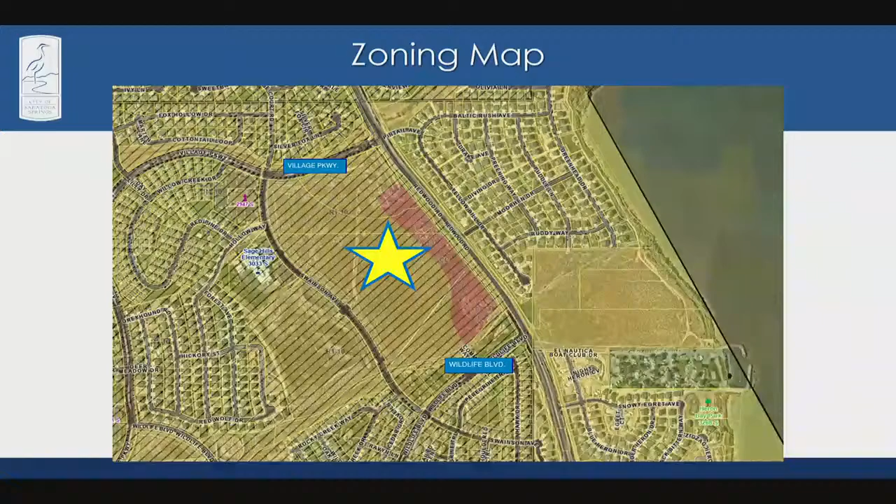So it comes for feedback on the concept plan, but a PUD also allows what we call variations, and so there are some requests. Okay, so just for those that aren't familiar with the area, this is in between Village Parkway and Wildlife Boulevard. So it's that empty piece of land there, and we already had a public comment tonight on this area. This is the concept plan that they're proposing.

It comprises of 172 single-family units, 136 townhomes, for a total unit count of 308. They have approved MDAs, which allows them to go up to 335 total units. So this is actually below the total unit count that they're allowed per the MDA. Also the MDA allows them to go up to 136 townhomes, which is what they are currently proposing on this plan.

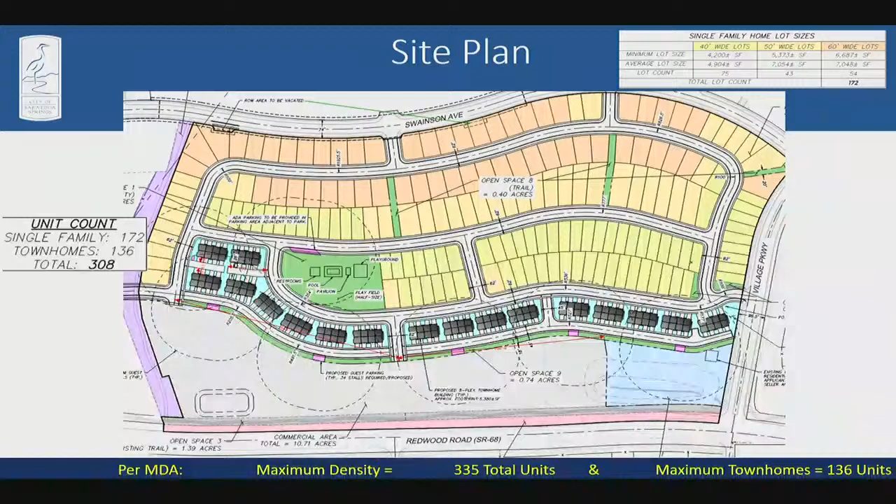The concept plan does propose lots with reduced widths. This is common in a PUD because the purpose of the PUD is to protect the hillsides and the open space, and so we encourage clustering. And when you do that, it's typical to see narrower lots.

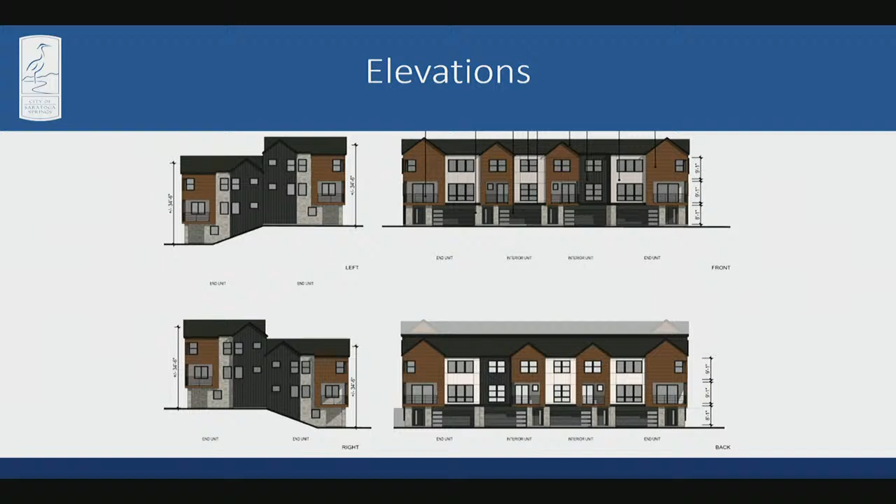In addition to the concept plan they're proposing, they're also requesting some variations. As mentioned, they're requesting a variation on the lot width, to go from 70 feet down to 40 feet, and then lot size to go from 10,000 square feet to 4,200 square feet. Those are standards in the R110 zone, but because it's in the PUD, those are typical things that might be granted. The other request that they have is a request on maximum height.

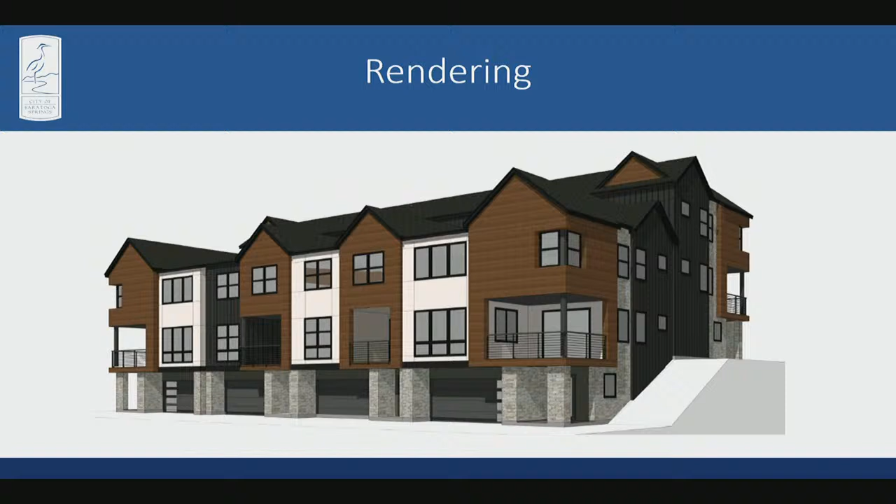So they have two requests here, either A or B, and they're hoping for one or the other. Preferably, they are asking that height be measured differently than we outline in Title 19. They're requesting that we measure the height from the front of the building, so on those split units, you would measure the height from the bottom unit up to see where it is, and then go around on the other side and measure the height from there.

So they're requesting the midpoint? Yeah, that would be the midpoint of the roof. My comment was right. Yeah, correct. The only time we'd measure to the top of the roof would be if it was a flat roof structure. But on a sloped roof, it's to the midpoint of the roof.

So their request is either to measure the height from the front of the building, or if we're not willing to do that, then their other request would be to have an exception to allow a height of up to 41 feet, 6 inches. The standard in that zone is 35 feet in the R110 zone. So they request, if we don't measure it the other way, then they would request that we grant them a 6 foot, 6 inch exception.

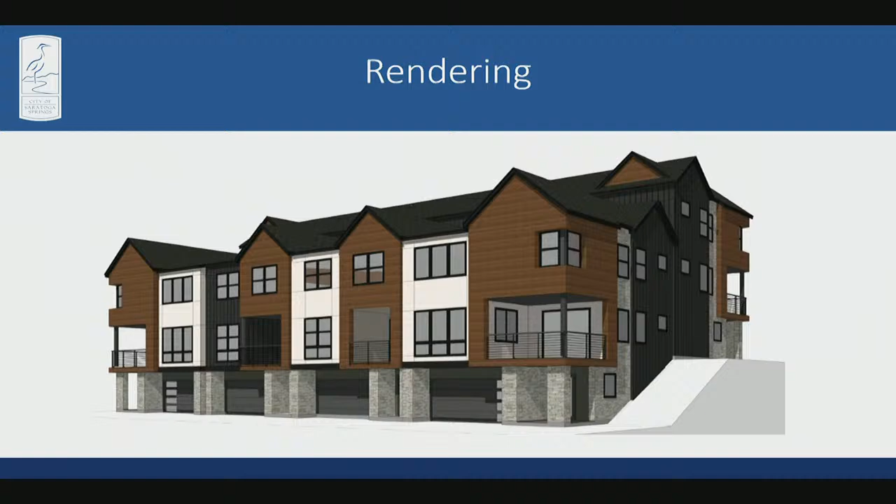It doesn't show. My understanding, correct me if I'm wrong, is the pitched - we're not quite through the presentation, but there's two products they're proposing. One is a flat roof product. If that's not amenable and approved, then the pitched roof product is what they would propose, and that could meet code the way it's shown? Well, not necessarily. You still need the height measurement. Okay, I'll let them get into it.

The applicant has a presentation as well, but we'll keep going through ours and then they can give theirs.

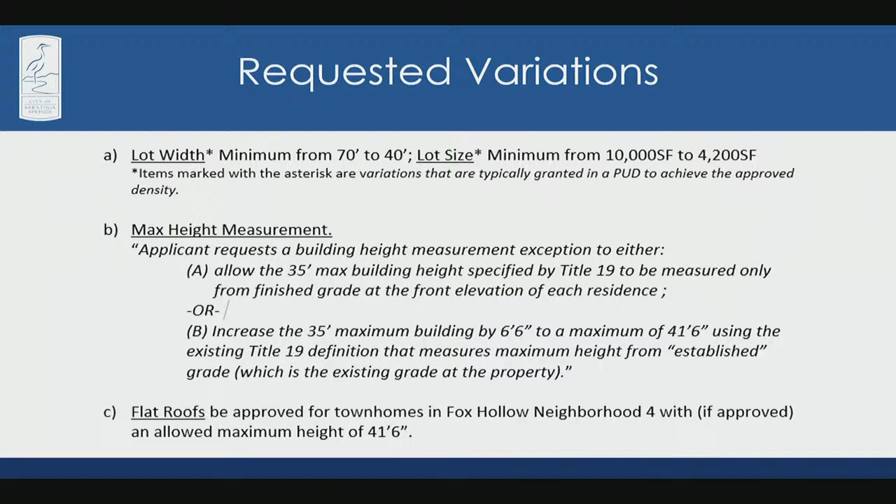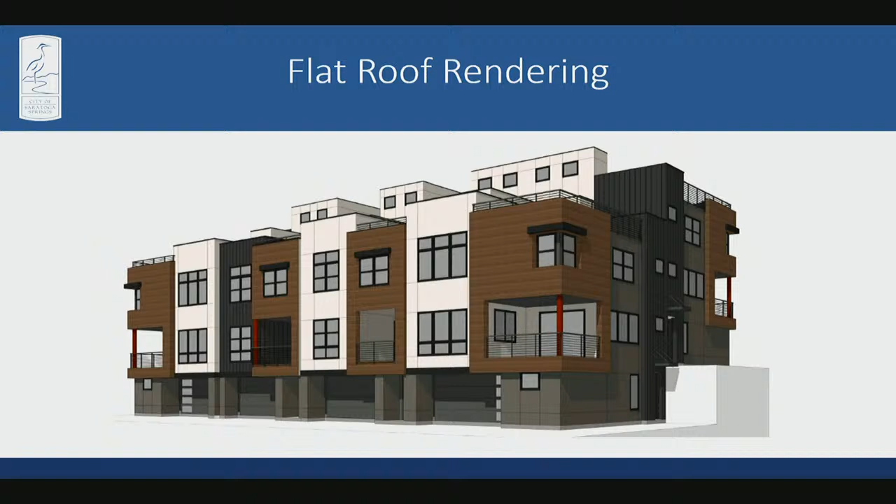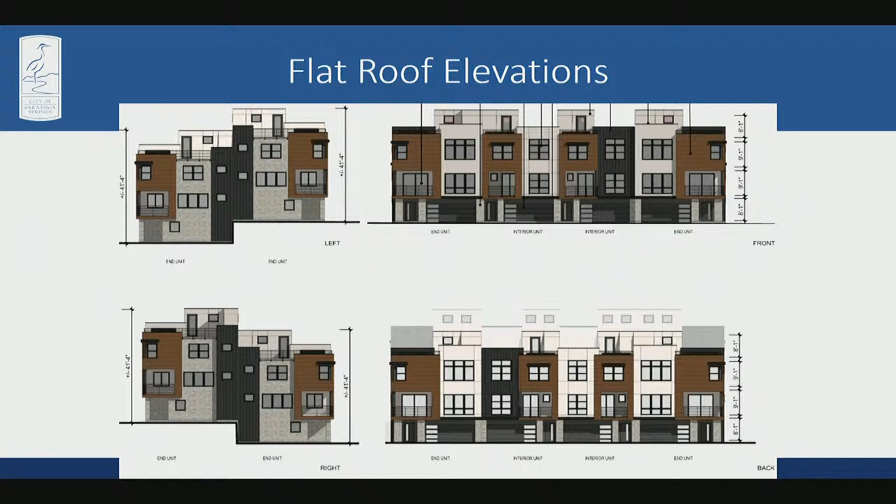What's the height of that product? If you measure it to the midpoint, it would be the 41.6 to the highest point of the flat roof structure. So they could make either option work with that height exception for this flat product. But one of the things it would give them is additional living space. These units, because they're back-to-back, don't have a yard like a backyard, so it would provide some kind of living space for the townhome residents.

Austin, real quick, has Jess looked at the building height on this one for fire? I know typically the residential height is closer to 33 or 35 feet. 35 to the midpoint. Right, so my only question is has he reviewed these for height relative to fire response and things of that nature? We haven't asked him to. Okay, yeah, we looked at these in DRC, but we haven't. The only reason I bring that up is it would require probably a ladder truck if there were a structure fire, and we have one, but it's a longer response time.

Or is that just with the flat roof? Yeah, so you have to remember there's two things here. On a pitched roof, we measure it to the midpoint of the roof. So it's normal for it to go a little bit above that line, but if it goes more than the midpoint, then they're kind of in trouble. So as long as they can keep it under that, then they can make it meet our code.

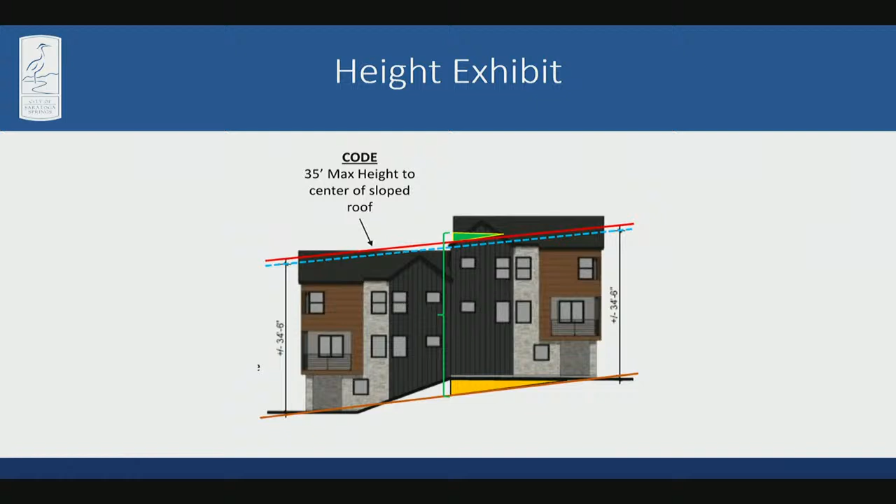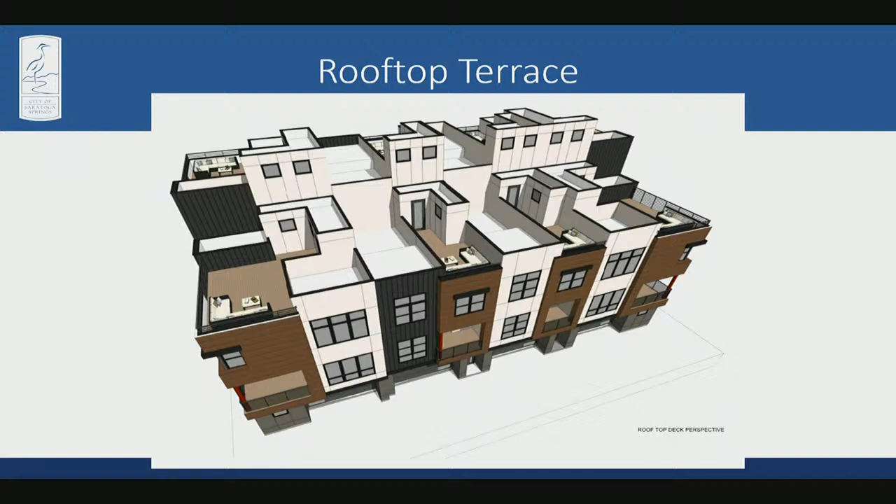David Crockett on behalf of the applicant, Pulte Homes, 6965 Fort Union Center in Cottonwood Heights. First of all, on behalf of Pulte, we're delighted to be here. This is the first time we're actually submitting an application to the city of Saratoga Springs. So we're really excited about that. We're hoping it's the first of many opportunities that we'll have to address you.

If I may, just for a second, Pulte Homes is a large public home builder. We're the third largest in the country. We're making a market entry into Utah. Our founder, Bill Pulte, started the home building company 74 years ago and has built a great reputation. He's since passed, but our current CEO is actually from Lake Point out there by Tooele, born and raised, and then a graduate of University of Utah. In case that's concerning to anyone, I'm a graduate of BYU, so there's a little bit of balance for everyone. But some of you may be fans, so there we go. There we go, good balance.

So thank you again for the opportunity to present before you today. In June of 2022, this board, or maybe some makeup similar to this board, would have approved a concept plan that had this site plan on this very site. That site plan back in 2022 had 136 townhomes and 172 single-family homes. We've matched that with our site plan.

One innovation you'll see is this townhome product, where we've taken the townhomes and made them back-to-back, and then put a step in the building. That allows us to be responsive to the grade, which is one of the code requests - they want us to step down the side of topography when we can. When we do that, we take all of the buildings you see there with the blue background, the white that has the blue around it going up the side of the development. There are 29 buildings represented there.

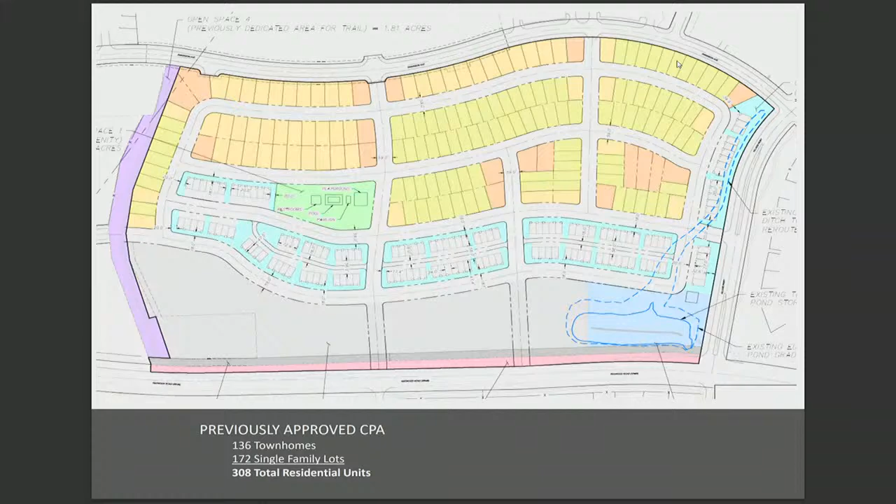And if you think about all that building mass, we actually consolidate it into 17 buildings. These buildings on this map are also 6 units wide, quite a bit wider than our buildings, which are only 4 units wide. So if you were to drive through the community built out in this scenario versus the scenario we're proposing, you would see far fewer buildings, and the mass or width of those buildings is narrower overall, while we still maintain the same unit count. This also helps us be much more responsive to the existing terrain.

Most home builders and their civil engineers, if doing a good job, try to match or balance the cut and fill on a particular job site. We are very close to doing that here. On average, our cut and fill is about 1.5 feet. Along where the townhomes are, our worst condition is 3 to 4 feet of cut or fill in any one location. On a site as large as this, going from Swainson at the top of the screen down to where the townhomes are adjacent to that future commercial, there's over 70 feet of drop in that dimension. So we're working against that situation.

And then when you go from north to south, it's not just perfectly flat - there are actually pockets where the ground undulates like that. That's an important thing to point out, which we'll get to. Right by the park, the park's right above it. Yep, it's across the street from that park.

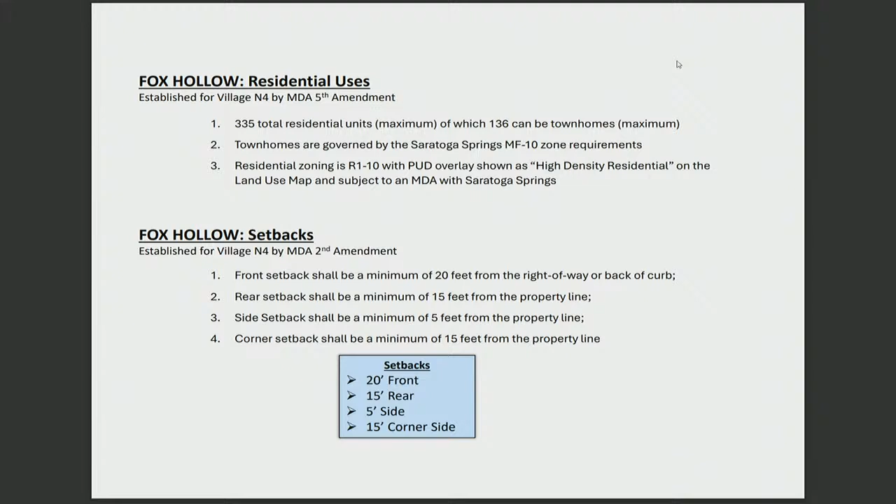In terms of the master development agreement, it's that Fifth Amendment that specifies the 136 townhomes. It also specifies the 335 total units, as was pointed out previously. We're submitting for something less than that, 308 total units. We're also designing to meet all of the setbacks called out in the Second Amendment of that MDA, so consistent with both of those.

Our single-family detached architecture, these are images from the front of the buildings. We have 40-foot wide lots, 50-foot wide lots, and 60-foot wide lots.

These lot widths in the MDA were allowed to go down to as little as 35 feet of width. The developed community that's already out there has lots smaller than the ones we're proposing, and some that are larger, because you can go as large as you want effectively. So some mix of all of that, and these lot sizes fit within that master plan and that MDA.

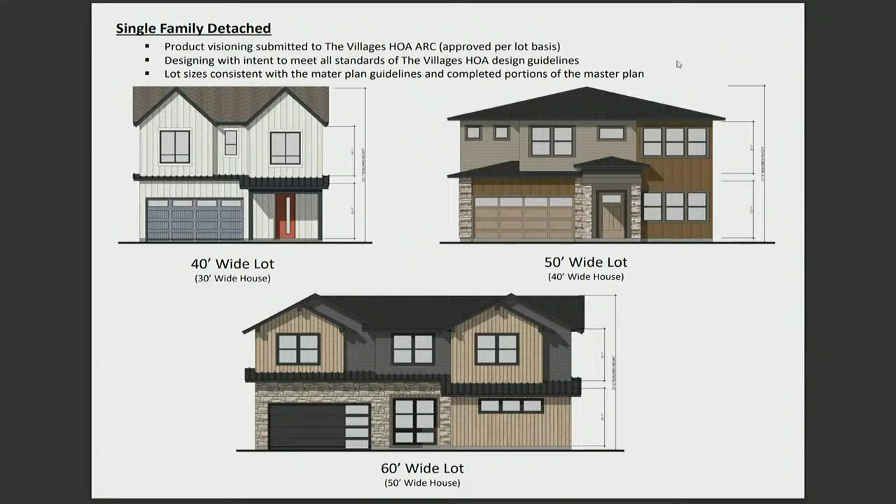We're also designing our product and coordinating with the Villages HOA ARC review committee on all of this. Those permits and approvals are done on a lot-by-lot basis, so that's later down the road as we're building the homes, but we've started that process already.

As you've seen, we have this townhome. It has four-sided architecture because you have front entrances on both sides of the building, and then you've got this articulation around the building, so all sides have a nice architectural elevation. You can see the step in the building in this side profile view.

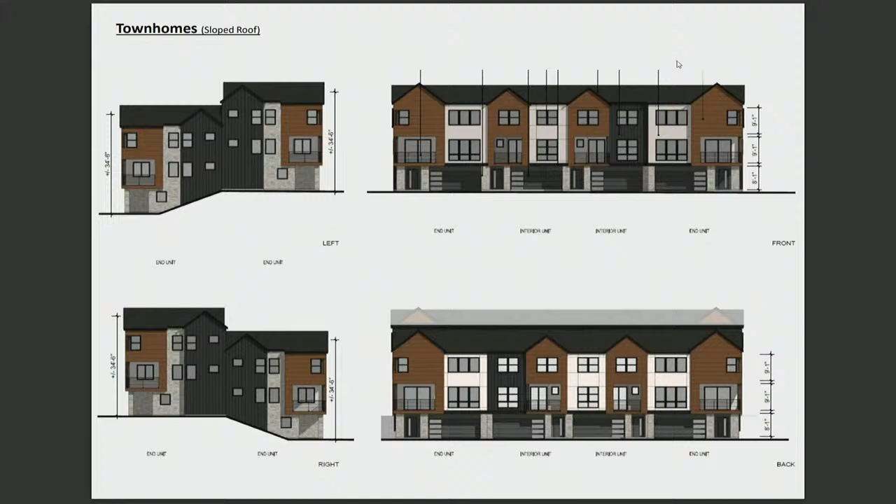Now we get to the nuance and the key request we have tonight. One of the challenges is, if this were as simple as measuring 35 feet from the foundation of the building to the top, we would meet that. Our building is actually 34 feet 6 inches tall, shorter than the 35-foot requirement.

Where we get into the difficulty is we don't actually measure, in code from Title 19, from finished grade, where the site actually gets finished, where people will be walking on the sidewalk, looking at the architecture, or driving through the community seeing the building. That dimension's measured from where the grade is today. Even though that grade will change, we could grade down and meet all of our buildings without making any changes whatsoever, or we could grade the site up and have all kinds of problems. We're trying to stay as close to the existing grade as we possibly can.

What we see here is that brown line on the screen is the line at the very bottom, and that green line on the bottom would be finished grade. In scenarios where we might be grading 3 to 4 feet max, making sure sewer flows the right way and drainage flows across this huge site, that all life safety elements and requirements are met, going from the grade and access point from Swainson at the top of our site, connecting into the commercial site and meeting all code requirements for how those streets slope down and connect into those locations - as we run all that complicated math, the issue is we're not measuring from this finished grade, which is what we would really hope we'd be able to do.

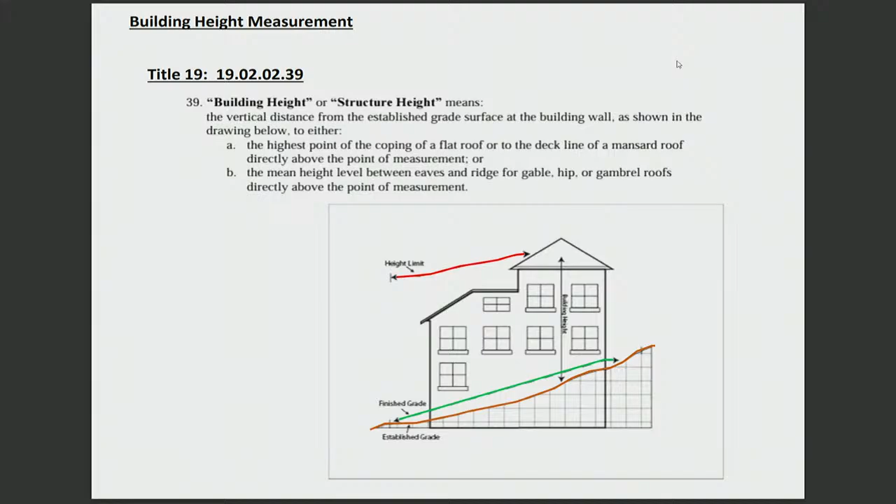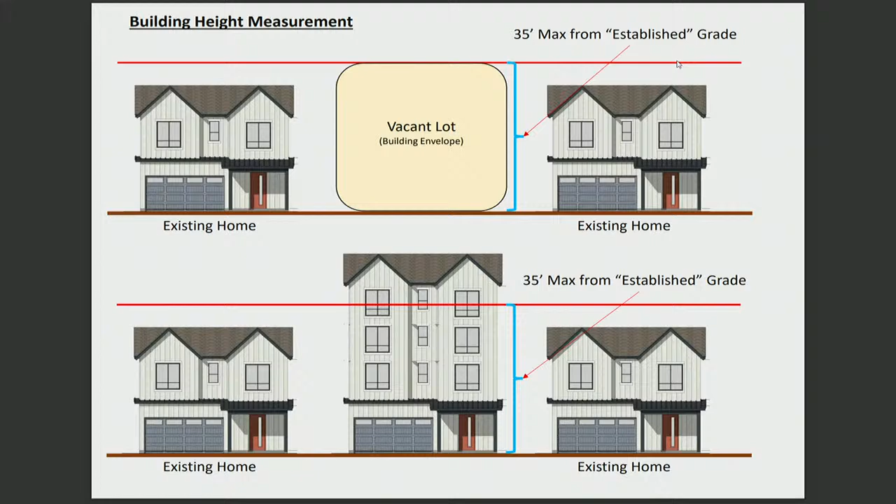I'm going to keep going to show a couple other exhibits. It would appear to us that the intent of the way that was defined would have been to protect existing homes, where you might have a vacant lot in between them, from the house you see on the bottom of the screen in the middle being built. If you've got a community where they're all two-story homes, then someone comes in and tries to build some monstrosity, that would certainly seem unfavorable. So the code, the way it's drafted, would address that.

It would also address the same size home, but someone who wants to try to take advantage by building their lot up - the concept is there, right? Oddly enough, the picture on the bottom in the middle would actually be allowed. That would be code compliant, the way it's drafted, if you dug your home down.

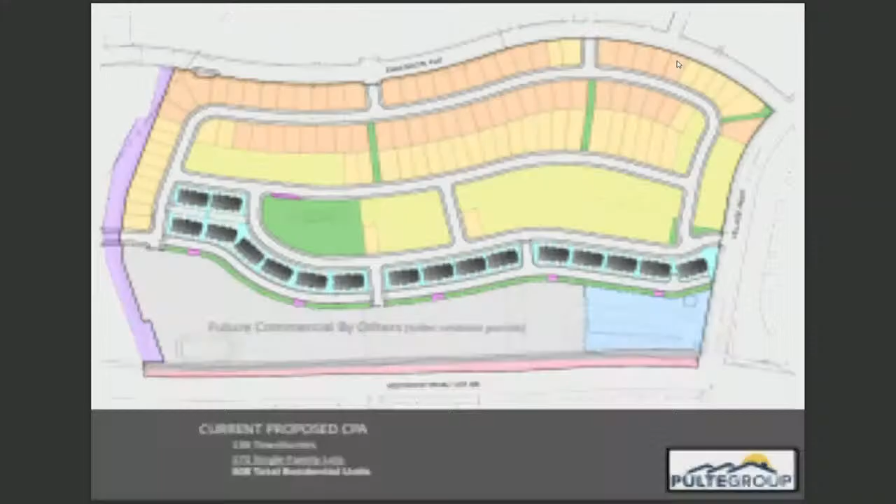So again, just kind of looking here at the site plan, the next image that I'll show you is actually our cut and fill. And what you'll see is just colors that go on this site, red and blue. Red is a cut location, blue is a fill location.

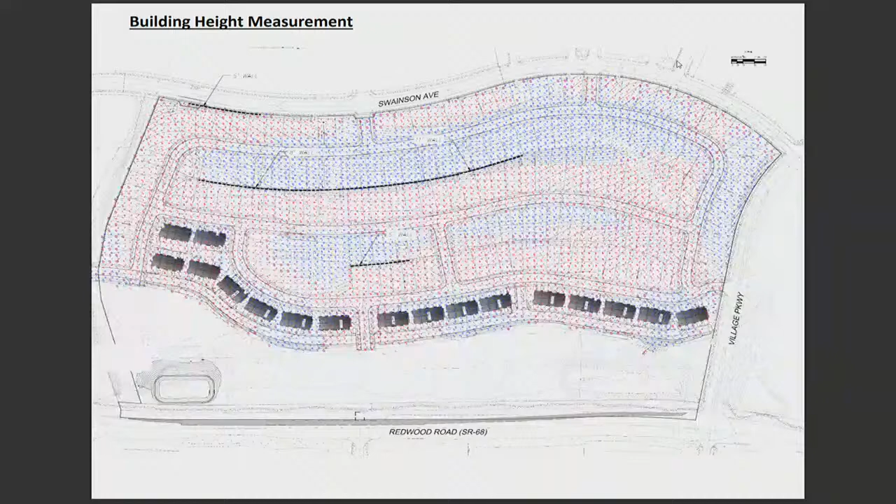As you look down there along the townhomes, you can see that from the north, there's just pockets where the ground goes like this, and we're just smoothing that out. In some areas that's a 2 to 4 foot fill, in other areas it's a 2 to 4 foot cut as we smooth all of that out to make it work. And so that creates a little bit of an issue.

Even though when it's finished grade and you've got that line there on the bottom, when you're standing in front of the building, our building is actually less than the 35-foot requirement at 34 feet 6 inches. Because the terrain is sloping down and we have fill in some areas, that area in yellow represents that 2 to 4 feet in a maximum situation, which is having the effect in the middle of the building of pushing that building up and making it feel taller, even though when we're out there, when the whole thing is graded and it's built, it won't look that way. It's actually from the existing grade today, which won't exist in the future.

And so we have a challenge in that area that's causing some constraints for us with that 35 feet. Then when you get to the top of the building, you can see that the way that measurement is made is from existing grade. So on that top red line, it actually slopes and follows the terrain of the property.

But the challenge is homes are rectangular shaped, right? So these homes aren't even that deep, but will meet the requirement at the front of the unit. But by the time you get to the back of the unit, because that 35-foot height measurement has to keep stepping down to be consistent with existing grade, then we run into a challenge there.

So it's as simple as, if we were willing to say we'll measure the 35 feet, which is the requirement, but from the front of each unit, then it'd be totally fine for us. And that would be what we're requesting today: to measure the maximum 35-foot height from finished grade at the front of each unit, and not from the established grade, which is the technical term, or the existing grade today.

As a side note, and I'm not sure if those images are in this—oh, they're not, okay. As a side note, just as a reference point, single-family detached has a different set of standards that apply to it in the way that they measure. We had some slides in here that helped depict this, but on a walkout basement, you have a house at the front that might be a 2-story home.

On the back of that house, where there's a walkout basement, you have a 3-story home. And if you were to measure from the footing or foundation there to the midpoint of that roof on almost every home, in the homes to the north of us and to the south of us, that dimension is probably 41 to 43 feet. Those are existing homes that are in the neighborhood right now.

But all of those homes are also on fill lots. So as the builder has developed, whether it was Richmond or anyone else, as they've developed those lots, they've created fill on those lots—some of them 12 to 15 feet of fill. And so if they were held to the same standard as the townhomes, those homes would be 50 feet in the air by comparison to what we're doing.

I only bring that up and point that out because the buildings that we're proposing here, even though it sounds like we're asking for this height variance, they're going to appear shorter than the backs of these walkout basements on the single-family homes that are all around to the north, south, and west of us. They're all building on the same slope. We have pictures that depict that and show that.

And so I just would point out that these buildings in this request are actually visually going to appear shorter than those adjacent buildings. They're just measured differently, the way that works through state code.

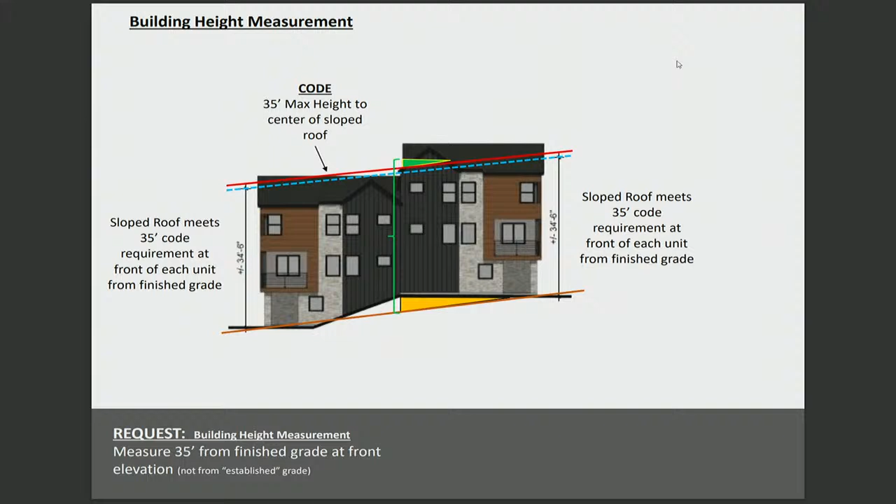So that was the first key request. I don't know if it's appropriate to pause here for questions or to keep going, because we do have one other one. How would you like me to proceed? Just keep going, okay.

So the second request has to do with indoor-outdoor living, highlighted in yellow here in the middle of the screen for the two plans in our townhome lineup. We have indoor-outdoor living on that main level, which is really important, especially since we have amenity space and open space in the community that people can access. But when you have a townhome, it's really key to have that indoor-outdoor living, so all of our units will have that.

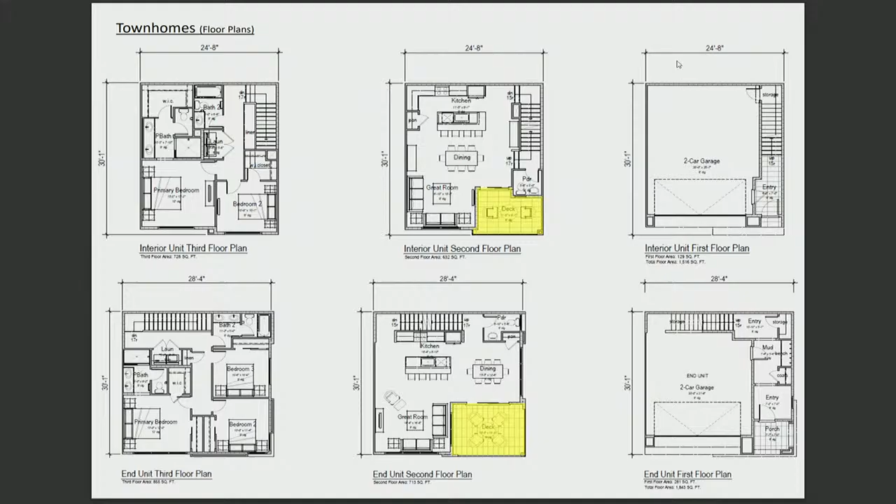What we would propose, because of the location, where you have views across the lake and across to the other side with the Wasatch Front Mountains sweeping into view, is really an opportunity to showcase the city's topography and beauty of its location, kind of unique all along the Wasatch Front, which is what Saratoga Springs has here. We think a townhome with a flat roof that would accommodate a deck up on the roof would be something that homeowners and residents would really appreciate.

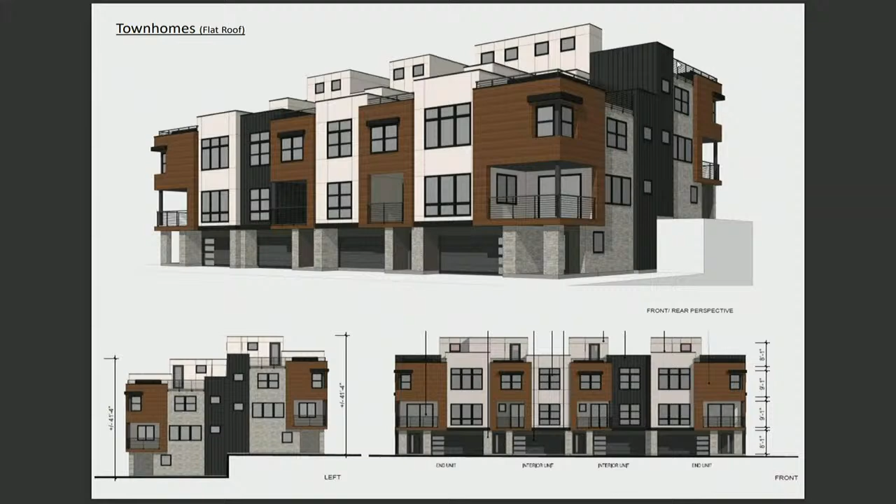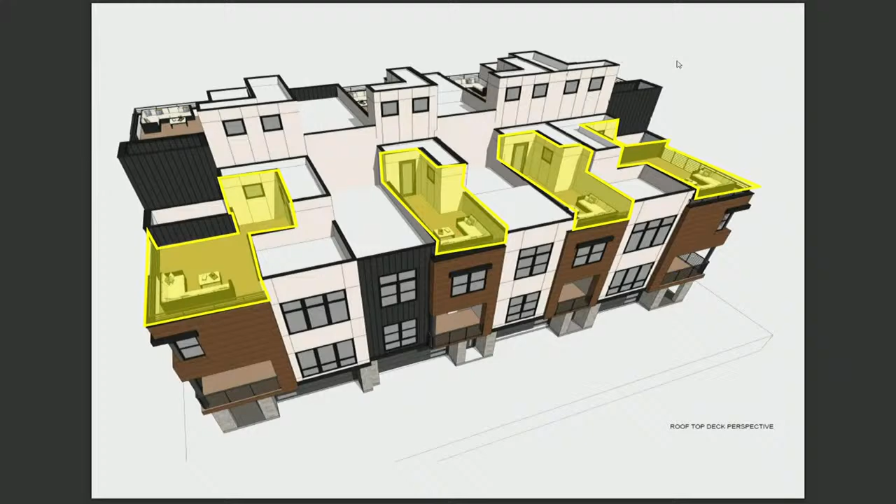Again, if the council does not want to support this, we understand, and the sloped roof product we're very happy to build exclusively as well. But we think there's an advantage to be gained here. You can see highlighted in yellow the rooftop deck locations—the way we try to design these is so that they're kind of separate and apart, so there's some privacy for individuals up there on the roof, and some elevation between each of those outdoor spaces to help them feel private and be very usable.

3 feet 8 inches taller, and it's only taller where we have the staircase to get them up onto the roof. Up on the front of the building, it's actually shorter than the sloped roof solution.

So the request here would be a little bit different and distinct for these flat roof products. It would be, A, to allow the flat roofs. Right now, they're not allowed. And B, if you were to allow it, to have that measurement be 41 feet 4 inches from the front of finished grade at each of those units.

Can I interject really quickly? I don't know that the applicant has seen this yet. I've been trying to reach out to the HOA for a few weeks, but we got a response this morning from the HOA ARC, and they have a concern with the flat roof design, that it's not going to match what's in the neighborhood. I wanted you to be informed, since it was forwarded just a few minutes before the meeting. The applicant does still have that request. We also let them know today that we got that feedback.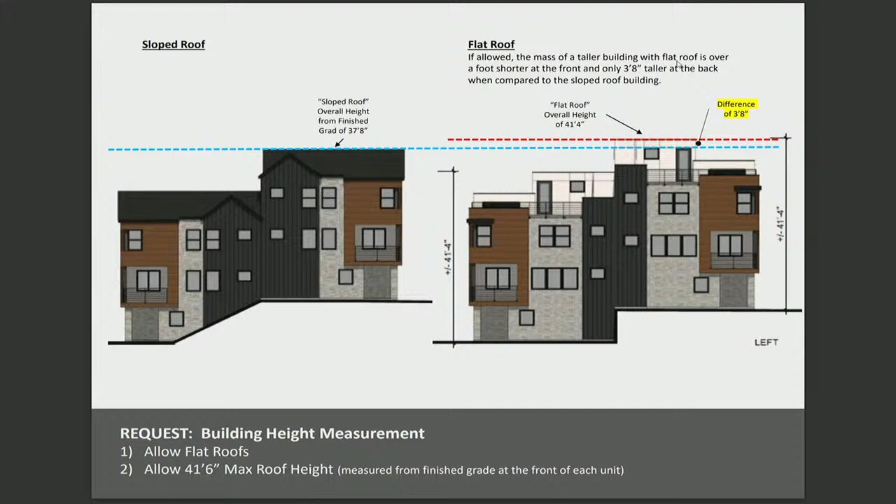Perfect, thank you. Okay, we'll start with the council. Councilman McComber. Thank you, Mayor. Just a couple things. On the requesting lot reduction, what additional open space did we receive? Because, what are we gaining? The whole point of a reduction is to get more open space. I'm seeing one park.

And that is a really good question. I know that in this plan you're seeing one park and some trail pathways. The comment applies to the entire master development agreement. So in the entirety, there was 25% open space overall. The park that's still not developed?

Right, right. And then this phase was granted the density that it has. So I understand what you're saying. Right, but we don't have to allow for more reduction in lot size. Or do we have to? Well, we have to allow the density.

We have to allow it, but they have to meet code. We've kind of run into this before. I think perhaps Kevin should speak to this, just because the master development agreement grants a certain density, and without some variations, they can't achieve that density.

I haven't analyzed this in the detail you're probably looking for, but when you're talking about priority of vested rights in this development and in the MDA, density is going to be number one, along with the types of uses allowed. Then you have to weigh that with the rest of the development agreement, including the ability to ask for lot size reductions and so forth. So you have discretion within the code and within the development agreement to grant those or not, or those variations, as long as it doesn't impair the vested rights.

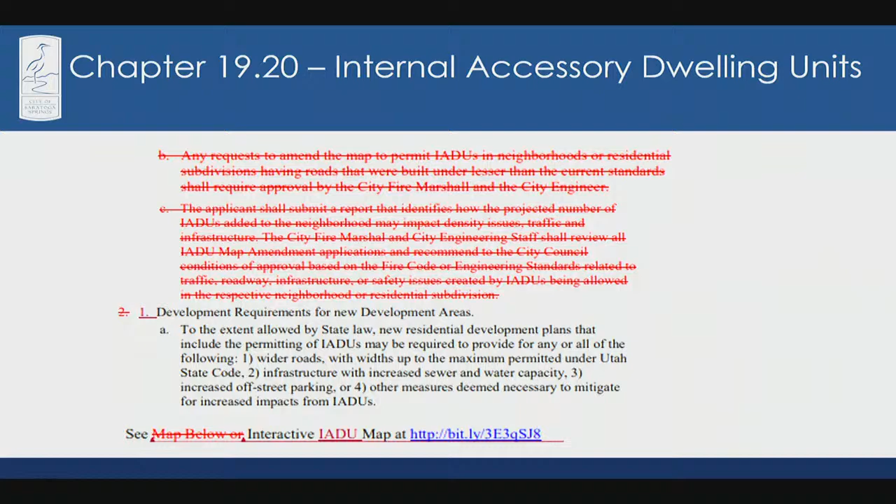Through our GIS. You can't read all of this, but intentionally it's just showing this whole section that refers to either the map itself or the process for requesting a map amendment. Here's more that continues on. So what's left is just that first paragraph on the last page, and then the development requirements for new development areas. We're just saying the map isn't attached below, but it's at this link—so crossing out the map.

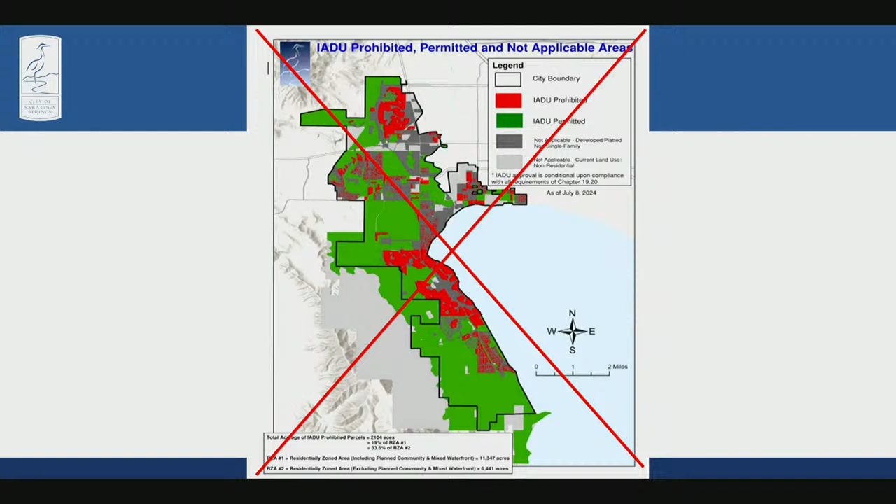This is what you asked us to do. Take that out, and future councils can come back and circle back if they want to include that process. We had a knee-jerk reaction when this was all coming in—I think we overdid it, and now we're cleaning up.

At the same time, we've got a lot of landowners, and we only have water to a certain build-out. We do need to protect the landowners' rights for future development, and we don't need to cram everything into what we have.

It's in the staff report—the planning commission did review this at their meeting early in September, and by majority they made a negative recommendation on it. Okay.

Any questions? I'll entertain a motion.

I move that we approve the amendments to Title 19 Land Development Code, Business Item 3, as listed on the agenda, ordinance 24-40, with staff findings and conditions. First from Councilwoman McComber, second from Councilwoman Barton. Any further discussion? Barton, aye. McComber, aye. Wilden, aye. Carn, aye. Wadman, aye.

Motion passes unanimously. We have item 4, the general plan land use map amendment.

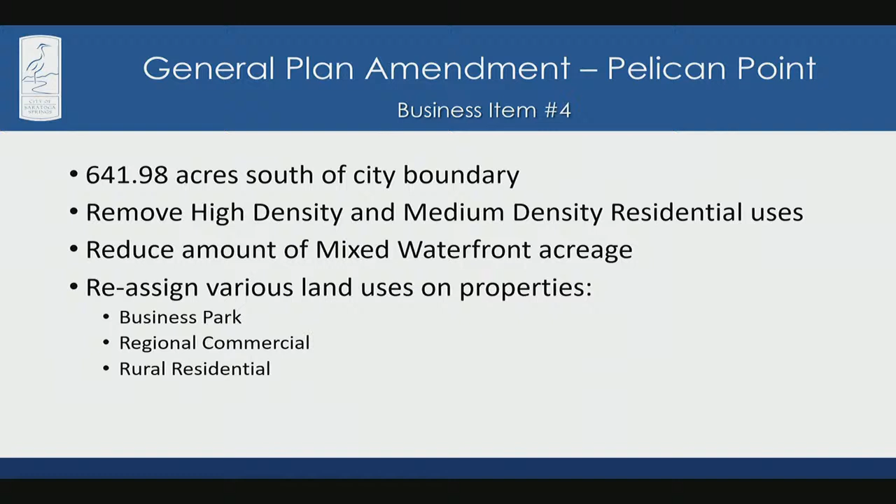In August at our work session we talked about this general plan amendment for that area south of current city boundaries down in the Pelican Point area, 641 or 642 acres, moving some land uses around, specifically removing high density and medium density and reducing the amount of mixed waterfront, which does permit some medium density. Here's what it is currently, showing uses of medium and high density in light and dark brown, and the blue, a large area of mixed waterfront in this area.

Planning Commission heard this, they recommend approval. I think this is what we were looking at. I'll entertain a motion.

I'm really impressed. People complain about how cities can really move slowly. I just want to thank staff. We talked about this in August, and they'll be back in October. This is great.

I'll move that we approve business item 4 as stated on the agenda, including any staff findings and conditions. First from Councilman Wilden, second from Councilman Wadman. Any further discussion? Wadman, aye. Wilden, aye. Barton, aye. Carn, aye. McComber, aye.

Motion passes unanimously. Amendments to Title 19 Land Development Code for the Gateway Overlay Parking.

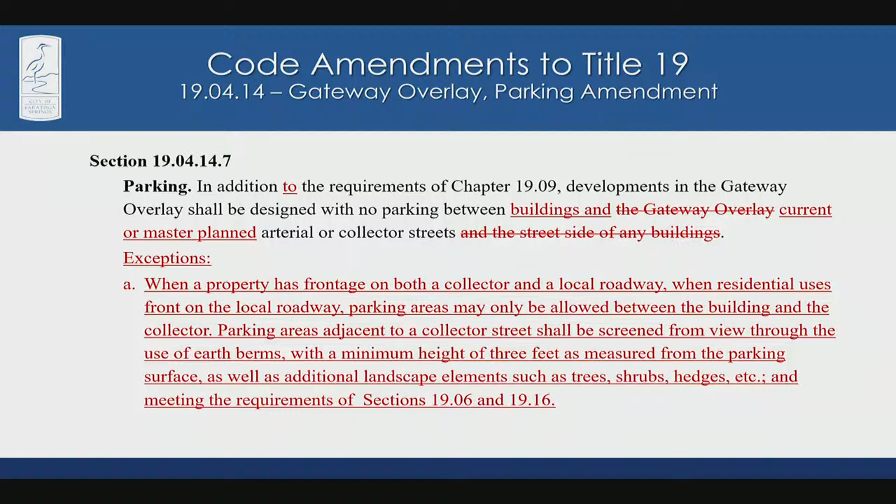I'll just summarize: it's basically what we talked about before, but if it has to go to one of the larger roads, it has to be screened by a berm of at least 3 feet. Before it wasn't required to be a berm, it could have just been bushes and trees, and those die, we know that. So now it has to be a berm.

Stephen and I both felt really good about it. Also, a traffic report will be required if it's on two arterials of the same classification, and then whichever one is the better standard applies. Yeah, that's great, perfect.

I will entertain a motion. I move that we approve item 5, business item 5, as stated on the agenda, ordinance 24-45, with all staff findings. First from McComber, second from Councilman Carn. Any further discussion? Wilden, aye. McComber, aye. Carn, aye. Barton, aye. Wadman, aye. Motion passes unanimously.

Sarah, the developer that this one was particularly impacting, can you let them know? Is it approved conditional on this, or do they have to come back? Because they had other reasons too. From my memory, all they would need to do is put a berm in. There were some other issues. Oh, you found some other — okay, okay, perfect.

Okay, I need a motion, well, we've got a closed session. Motion so made. First from Councilman McComber, second from Councilwoman Barton, all in favor? Aye. Aye. Motion carries.